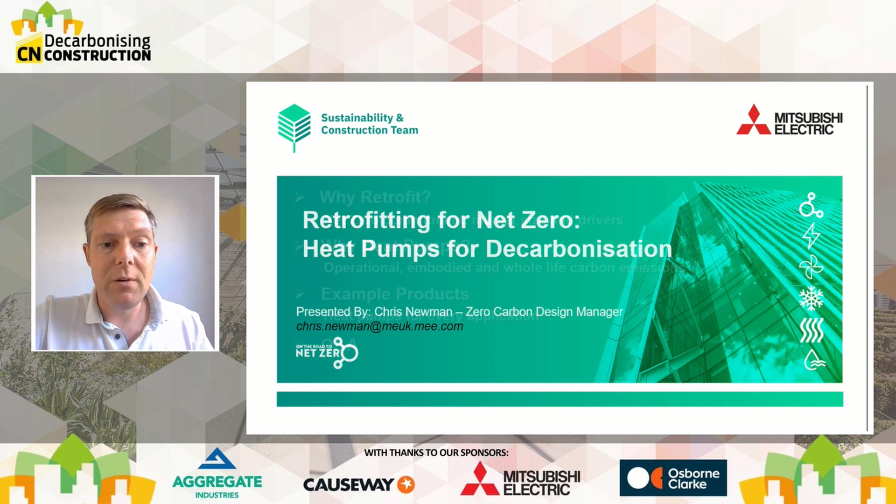The title of the presentation is Retrofitting for Net Zero, and we're going to look at heat pumps for decarbonisation. I thought I'd break this session into three short sections: why we're talking about retrofit, what exactly the commitment is, the market size, and what the drivers are in the market pushing everybody towards retrofit.

A little bit about heat pumps - why are they being seen as the method to decarbonise buildings? What is their operational carbon impact, their embodied carbon impact, and their whole life carbon emissions, to make sure they're the right solution. Then very briefly at the end, we'll look at a couple of example products and the types of things they might achieve in this arena.

And obviously we'll finish with some Q&A.

So why are we trying to get to net zero? Back in 2019, Chris Skidmore signed a document that legally committed the UK to achieving net zero carbon emissions by 2050. This was an increase from the original 80% reduction from 1990 carbon emission levels, which was part of the Climate Change Act in 2008. This increase put us on a pathway towards net zero by 2050.

So the way we look at this now is that effectively all roads lead to net zero. But it's a little bit like having a destination with no map - there's lots of different ways to get there. Everybody is on a different pathway; some people's journey is going to be a lot easier or more difficult than others, and some are an awful lot further down the journey than others. But ultimately, we are all heading to the same destination.

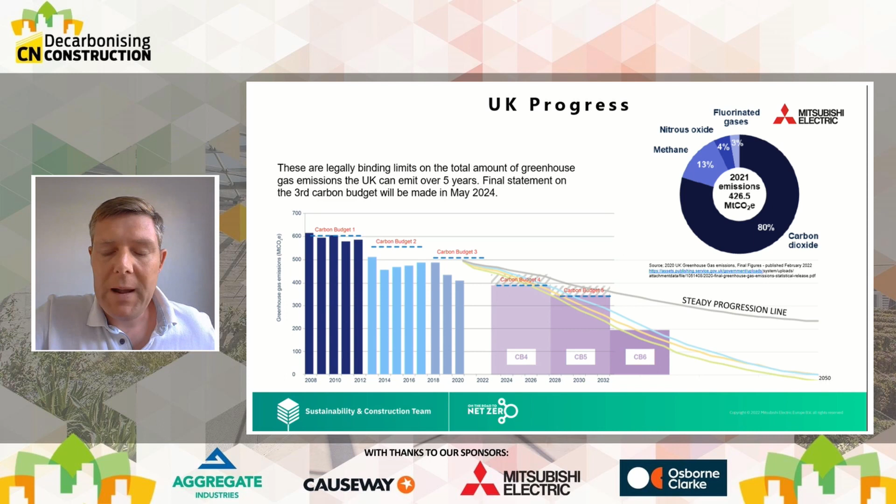As we try to do that, there's going to be an awful lot of policy levers that need to be pulled, and an awful lot of incentives that need to be generated to get everybody to take this path. Back in 2021, the Climate Change Committee, who are a cross-parliament body that look at government policy and how the government are approaching their own targets and strategies...

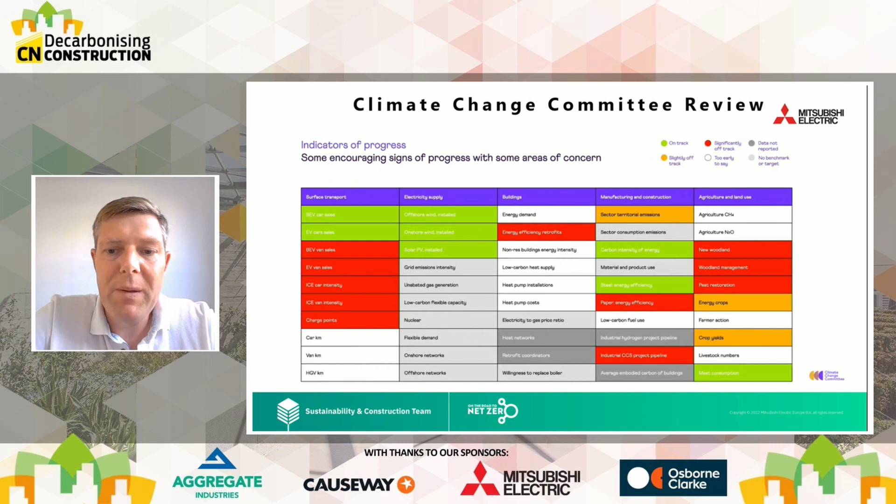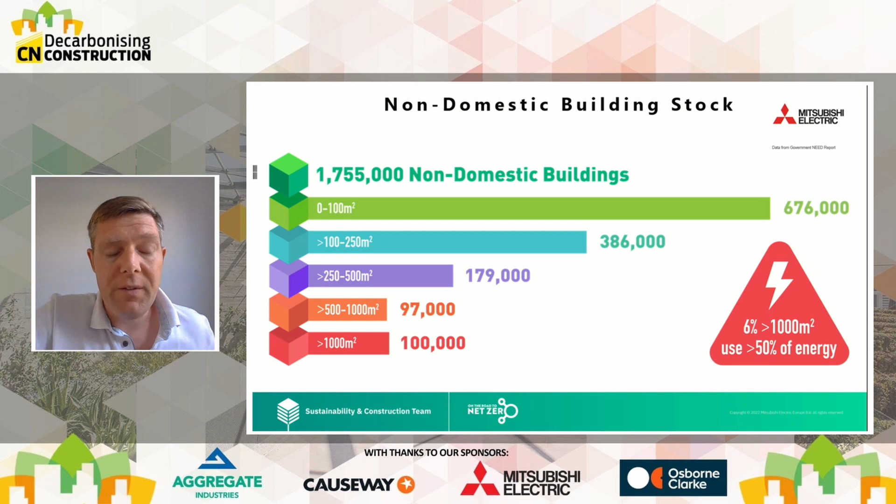But the thing I found quite interesting is that around 6% of all non-domestic buildings across the UK are larger than 1,000 square metres. So these are pretty big buildings. But that 6% are using over 50% of the energy of all non-domestic buildings. So there's an awful lot of work that needs to be done, especially on larger buildings, to get their energy consumption down. And obviously, as a result of getting their energy consumption down, hopefully that will also reduce their carbon emissions as well.

And when you look at the spread of the different types of buildings that we've got, everything from shops, hospitality, over 350,000 offices. They're more than likely going to be some of the larger buildings, along with probably a lot of the healthcare buildings, about 26,000 of those. But all of these buildings, no matter whether they are big or small, whether they are shops or hospitals, they have all got to decarbonise. They've all got to get to the legally binding committed target of net zero by 2050. And as I said, there's an awful lot of work to do.

But when we look at these buildings today, we've got to try and assess, well, what does a good building look like? And the way that the UK currently decides what a good building looks like is by using energy performance certificates, or EPCs. And you can see on this slide here that the lower your energy consumption per square metre, the higher up your EPC banding you go. Now, in an ideal world, we'd have all of our buildings really, really high up that scale. But unfortunately, that's not quite the case at the moment.

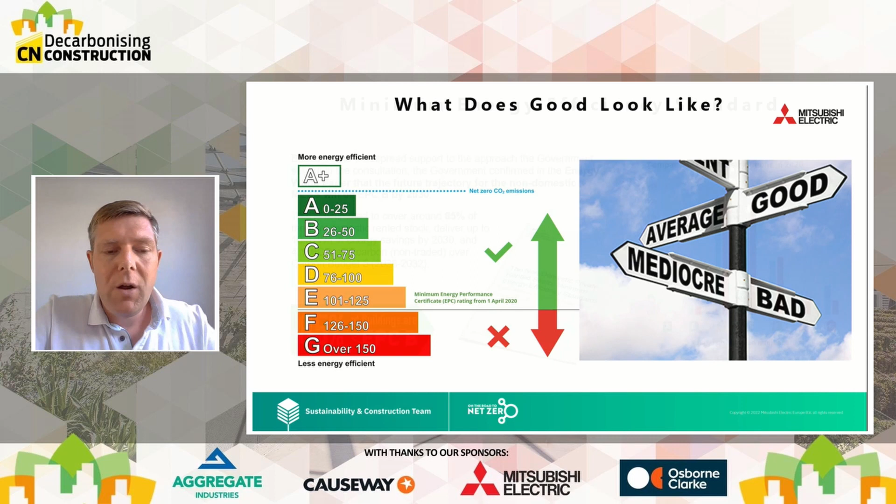And in fact, to try and push those buildings along up that scale, the government introduced the minimum energy efficiency standards regulations, and they were starting to increase the minimum allowable EPC rating that a building could have. And you can see there in April 2020, they legislated to say that any buildings that were F or G rated, those buildings wouldn't be allowed to be let or leased, or new tenancy agreements signed. And obviously those buildings then start to become much less attractive, much less valuable, and hopefully that will be a big incentive for those building owners to increase the energy efficiency of those buildings and obviously reduce the carbon emissions associated with them. But that's not really going to get us where we need to be.

So there was a consultation that came out of UK government back in 2020, concluded in 2021, about ratcheting up another minimum standard. And the outcome of that consultation is that it looks as if the government are going to legislate to say that non-domestic buildings need to get to EPC B by 2030.

If you don't drag your building up the EPC scale, you could end up with what's called a stranded asset. And you look there in 2030, all of those buildings that are C's, D's, or E's could quite easily end up falling into the same problem as buildings that are currently F or G's.

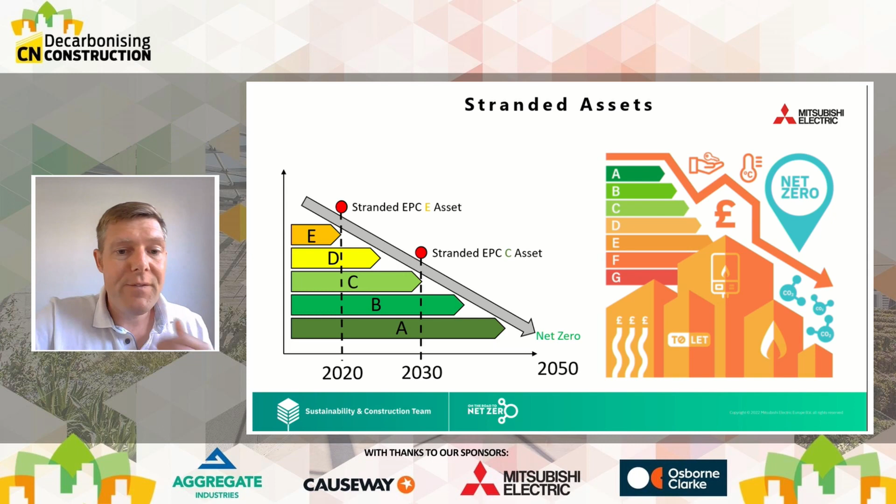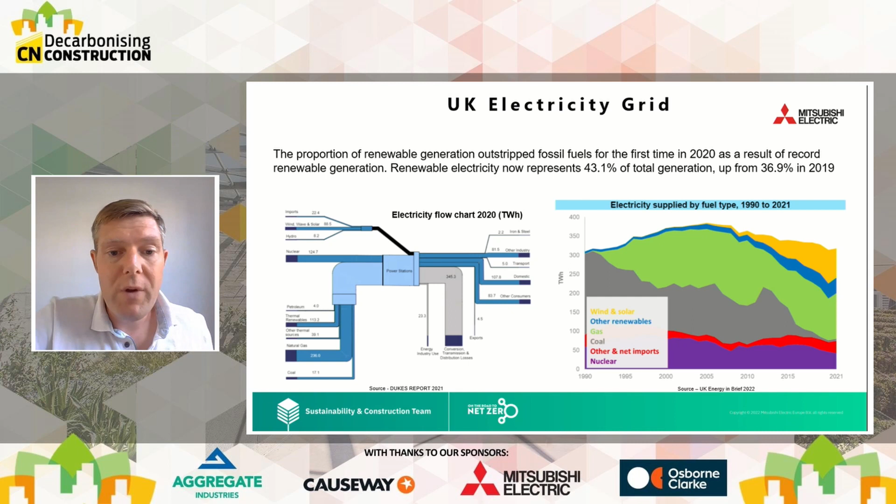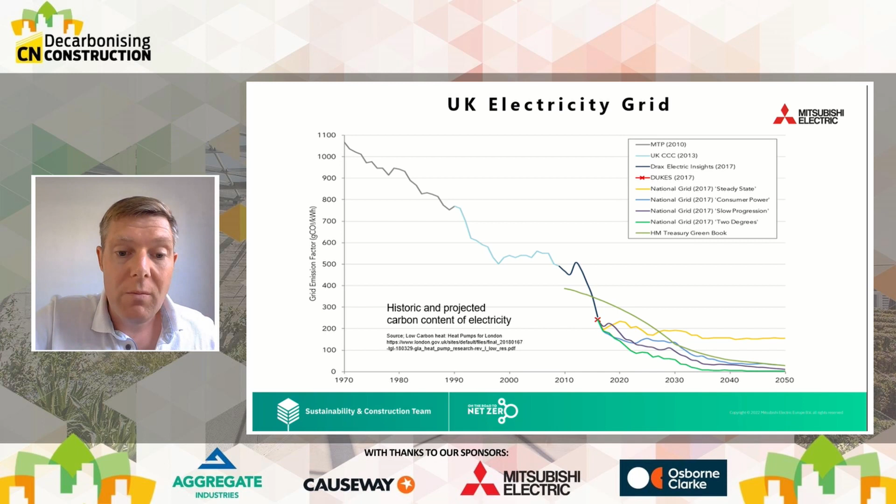Now, this particular data set was taken back in 2018. You can see that there were all sorts of different predictions as to what might happen with the carbon content, or the grid emission factor, as we call it, of electricity moving forward. But interestingly, they were all pretty much going down, which is good. And the latest data set that came out from the Future Energy Scenarios document, which I'll show you in a minute, has got even more accurate predictions as we move forward.

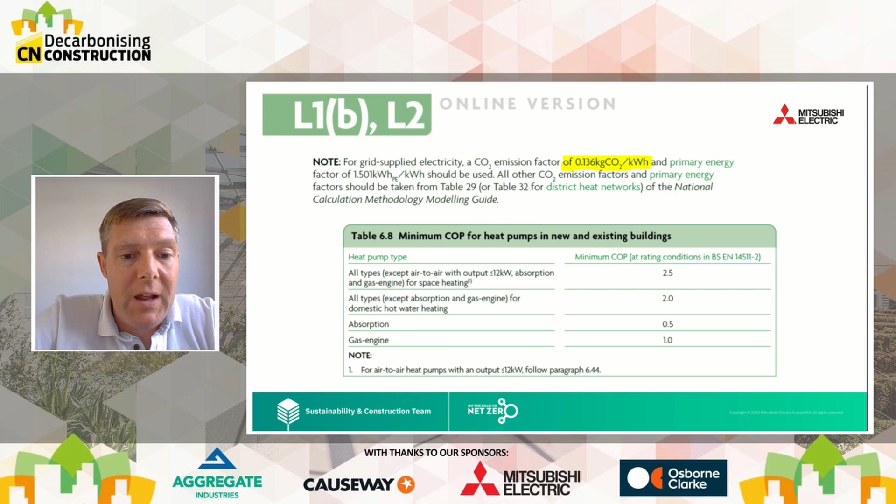But you can see that building regulations here, Part L, needed to keep up to date with these changes in the electricity grid emission factor. And in the update in Part L in 2021, grid supplied electricity was then reduced in its carbon impact down to 136 grams or 0.136 kilograms of CO2 for every kilowatt hour. So at least the measurement for building regulations is now actually keeping up with the decarbonisation of the electricity grid.

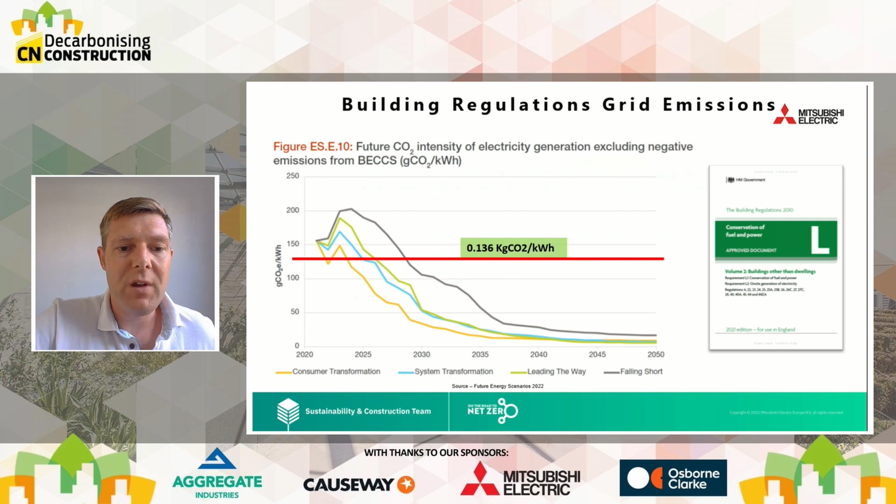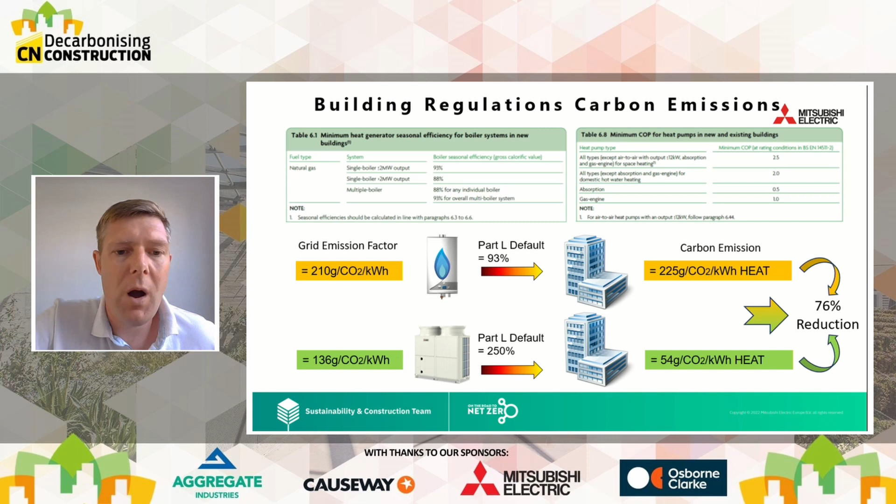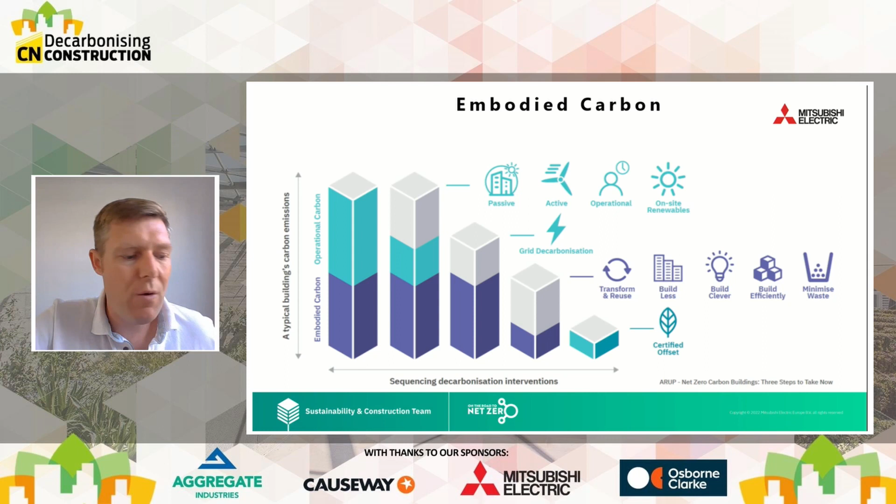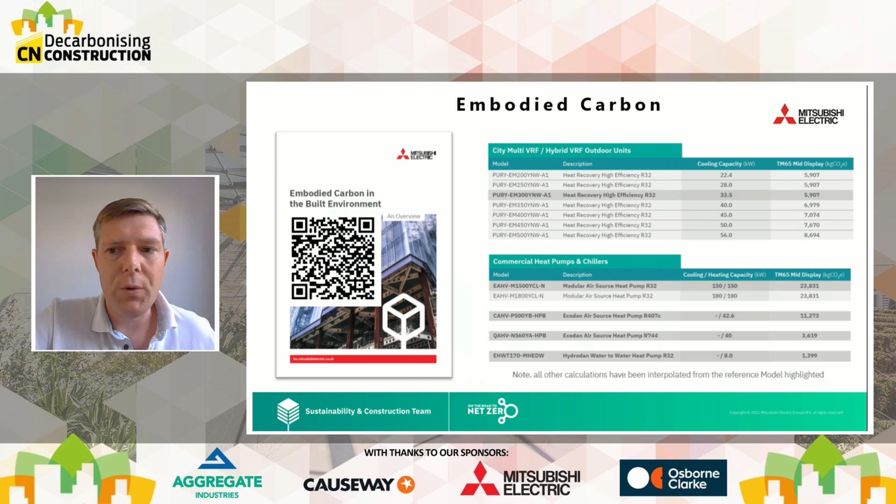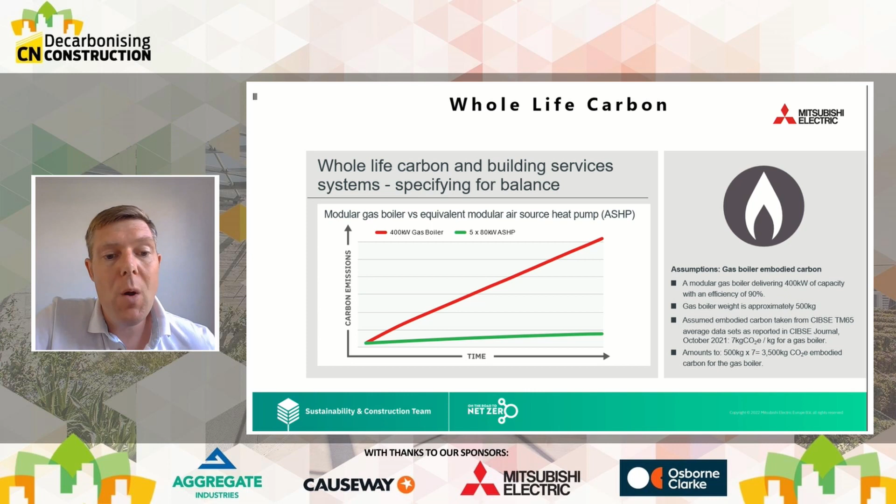But I've done a couple of quick examples for you. So we took a 400 kilowatt gas boiler, pretty typical for a commercial building. We matched it up against 400 kilowatts of air source heat pump. This particular example is done against 5 80 kilowatt modules. And you see there that the gas boiler's embodied carbon is about 3,500 kilograms. And if I move on a slide, you can see that the air source heat pump's embodied carbon is over 69,000 kilograms. So there's a real big deficit on day one to make up.

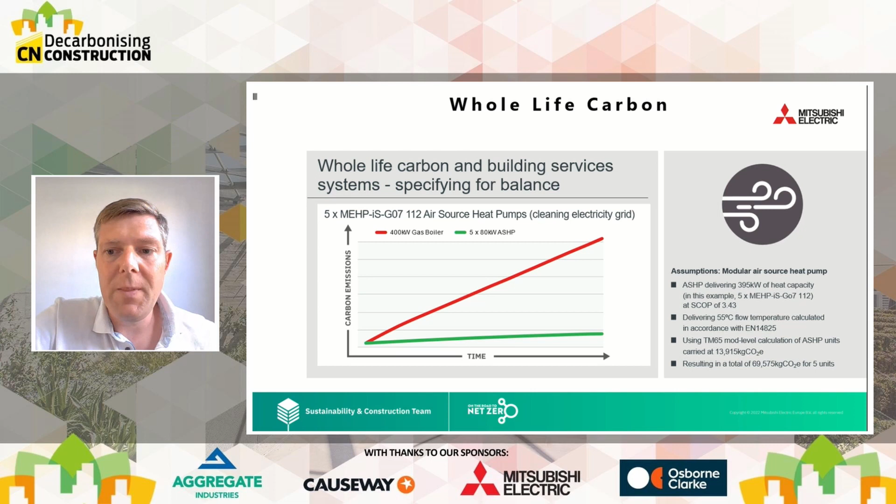But based on that difference that I explained before about operational emissions, we know that over the whole life cycle of the product, the whole life carbon of those two solutions looks very different. You could be talking somewhere in the region of 5 times more whole life carbon emissions for delivering the same amount of heat from that gas boiler rather than from the heat pump. So I think that if you consider operational emissions and embodied carbon emissions and whole life carbon emissions, heat pumps still do seem to come out on top as being the right solution for decarbonising our buildings.

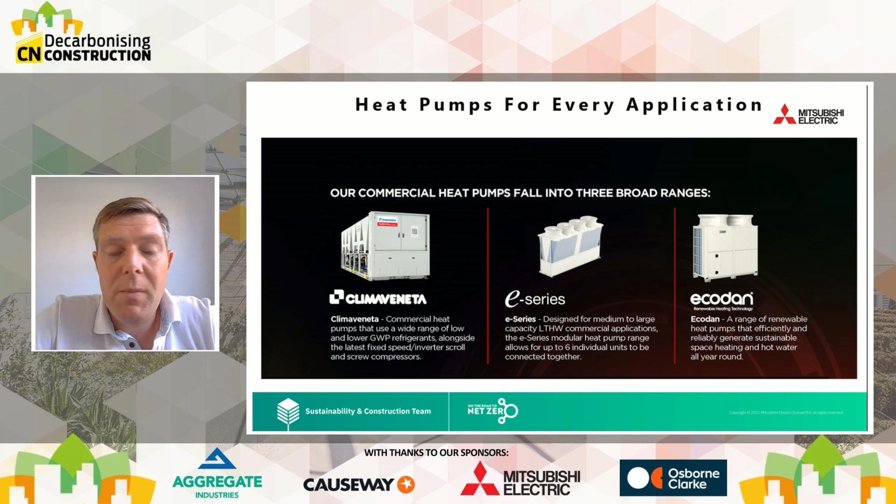So finally for today, I was just going to give you guys a very brief example of some of the products that we look at and what they tend to be able to help you with from a decarbonisation point of view. We kind of break this down into 3 key ranges: our Climaveneta large capacity built to order products, our E-Series modular equipment, and our EcoDan equipment. And if we look at an example, we can see here that this MEHP unit, this is pretty much our most efficient heat pump that we make.

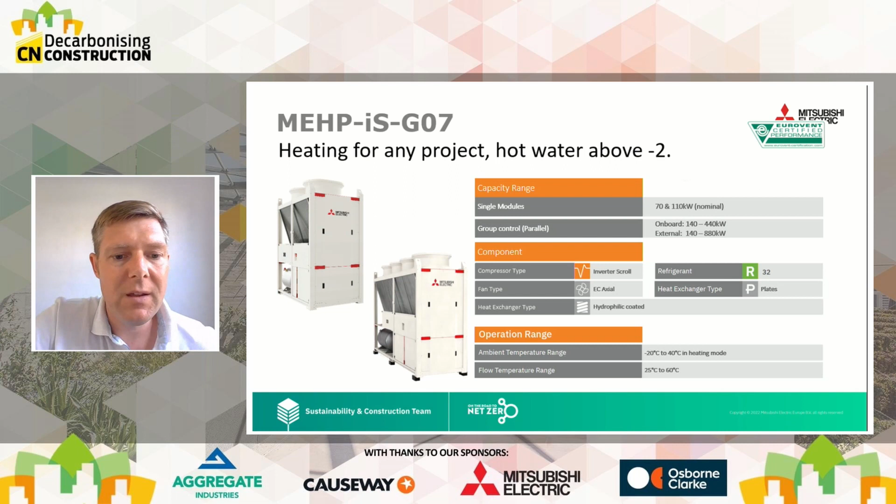Modularization is becoming more and more important. We're finding it really useful when we're trying to decarbonize buildings to take a modular approach. Usually because of plant space reasons, but also because it can often be a staged approach where part of the building is done and then another part of the building is done. But this particular unit will get up to 60-degree water temperatures, a little bit higher as well. It'll do 65 down to -2 ambient. This uses a reasonably low global warming potential refrigerant, fully inverter driven, and you can obviously get some reasonably big capacities from this machine. So we're starting to use this quite a lot from a decarbonisation project point of view.

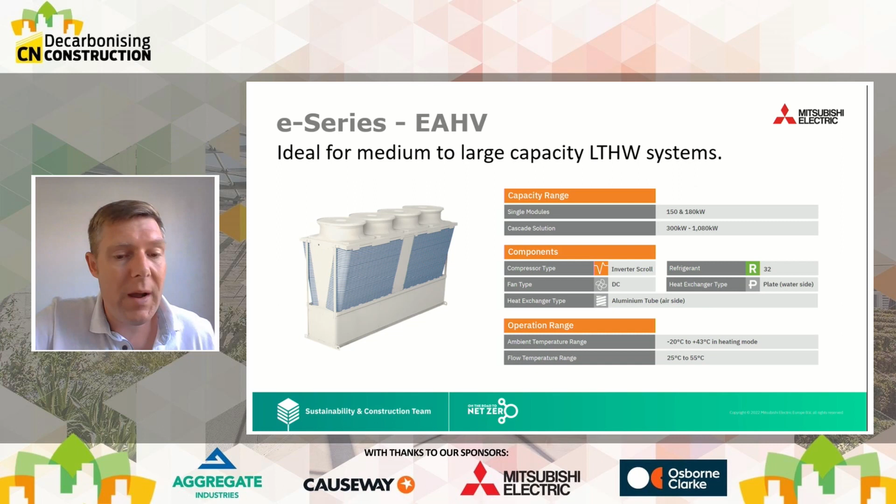But one of the downsides maybe to this unit is it will only generate up to about 55-degree water temperatures. And if that's not quite enough, then maybe you might need to look at another air source heat pump solution, which can generate up to 70-degree water. Slightly bigger, but it does use lower GWP refrigerant, full inverter driven, as I said, and these units cascade into groups up to 16 as well to give you over 600 kilowatts of capacity.

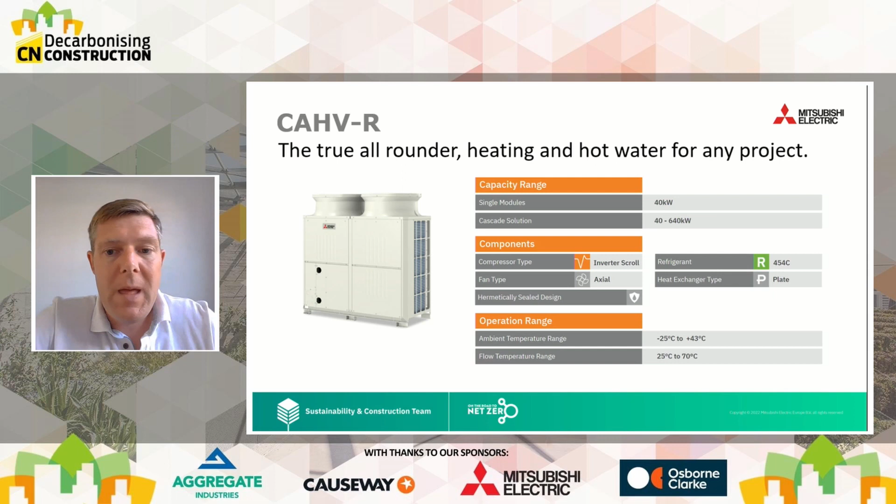So they're pretty appropriate for general decarbonisation projects as well. And then last of all is for hot water. Hot water is often a very easy target for decarbonisation, and we produce a CO2 QAHV unit, which is specifically designed for producing hot water all the way up to 90 degrees C to displace direct gas-fired systems, for example.

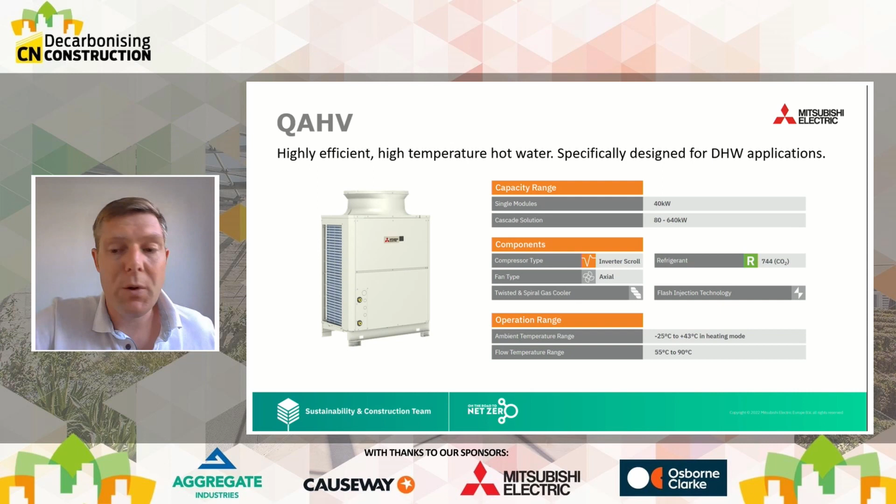So this is something that's starting to become quite popular. Across all of our ranges, really, you can see anywhere from sort of 5 kilowatts for an individual home, right the way up to over 1,000 kilowatts for a large commercial building, and anything from maybe 50 degrees all the way up to 90 degrees. We think there should realistically be an option for decarbonisation of heat on pretty much all buildings.

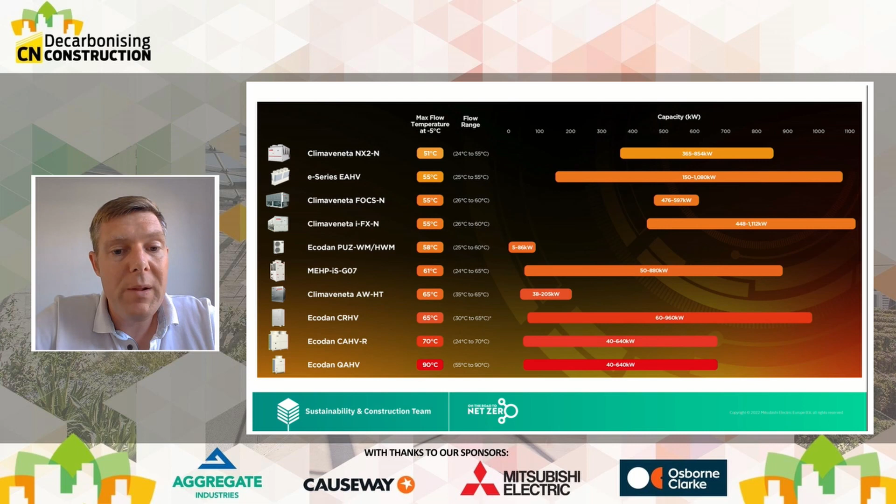So that's probably enough of presentation for me at this point. I think we're probably better off seeing if any of you guys were listening, if any of you guys had any questions.

Thanks, Chris. That was fascinating. Really interesting.

First question I've got is just wondering if you can give us a little bit of an overview of the state of the market at the moment in terms of client awareness of this. Is this knowledge and is the drive for these products widespread? And can contractors do something to reach the parts of the client market that you haven't quite reached yet?

Yeah, really interesting. I mean, I think client awareness is really quite widely known about all of this now, and there are a lot of clients talking to their supply chains to try and come up with solutions, especially clients that have set their own individual net zero targets. For example, although the UK is trying to get to net zero by 2050, there are so many organisations trying to get there a lot sooner, and their buildings are obviously a key part of that journey. So yeah, there's an awful lot of interest.

There are some big challenges though. I mentioned a couple in the presentation, plant space being the obvious one, but also trying to knit all of these things together. I think a big problem at the moment, I talked before about what good looks like, and good does look different to different clients. Some clients are very keen to get their operational carbon emissions reduced as much as possible, trying to get rid of their scope 1 emissions, for example, by getting rid of burning natural gas on site.